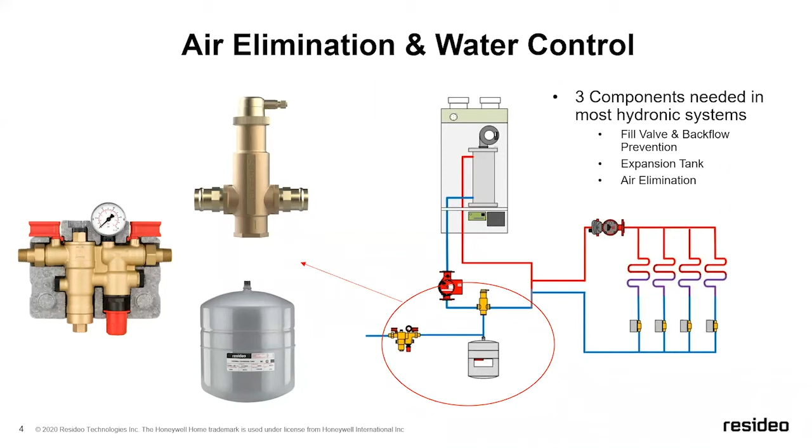Our current fill valve and backflow offering is, if you're looking at a good, better, best layout, we offer the better and the best, so kind of your mid-level and premium offering. We've got two different devices out there.

When you're looking at what this accomplishes, it really is just there to, one, prevent cross-contamination. So when you fill a hydronic heating system and you get it up to, let's say, 12 pounds, you start running it, you never want that water to work backwards into your city. The reason is, once this is filled, there's a good chance you're never going to have to touch that water in that system for 10, 15 years.

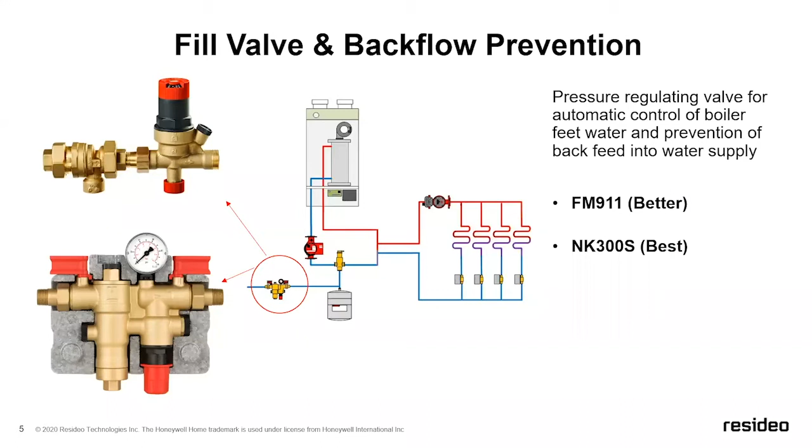So I don't know about you, but if I had a cup of water that had been sitting on a counter for 10 or 15 years, I definitely don't want to drink that. So the backflow prevention accomplishes that task. It prevents any water from working backwards. The fill valve is a glorified pressure reducing valve. So that's going to basically set your pressure, and these two different devices accomplish both tasks, and we'll get into a little bit of each one.

So the first is our FM911. We've had this out for several years. It is very similar to our plumbing D06 pressure reducing valves. But if we look at these two different devices, which are shipped in the same package, it includes two parts. First is a BP900 backflow preventer. The second is our VF06 fill valve. I've got a cross section below so you can kind of see what the guts of this look like.

So when I was talking about the backflow prevention, really all a backflow preventer is a glorified double check valve. It has two check valves for redundancy, so that if either one of those checks fails, you're going to get water bleeding through what's called the vent port. It's basically a drain. So if either one of those check valves doesn't seat properly, if the seats wear or tear, if you run into some weird pressure imbalances, it's designed to actually have water come out of the vent.

That's by design. Every now and then we'll get a call asking, well, what's going on with this? I've got water coming through. Chances are you've got something not seating right, and the most common culprit for that is going to be sediment that gets in and sticks that open. Once it goes through the backflow preventer, which is basically a big safety device, it enters our pressure reducing valve, or our fill valve, which in this example is our VF06.

So as water enters, it comes into a spring-loaded diaphragm that allows you to set the pressure at the very top of it. So we use what's called a dial set. It will show the actual pressure rating right at the top. And as you turn that red handle, either clockwise or counterclockwise, you're going to be adjusting the spring tension, which is going to adjust the pressure setting going into the system.

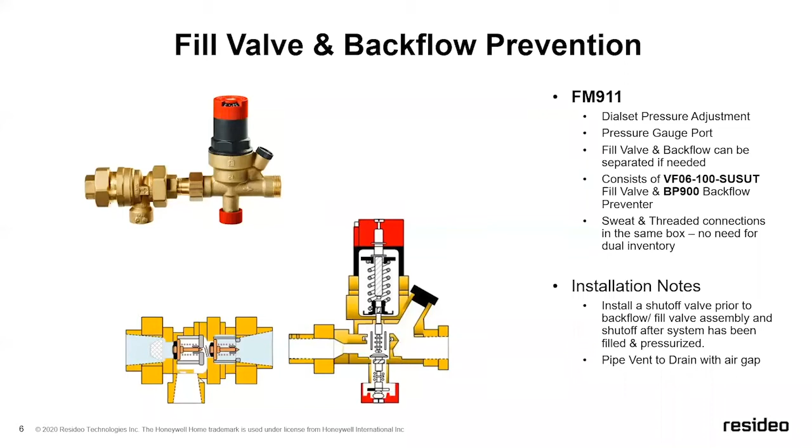When we step into our premium tier offering, we have our NK300S model. Now, this unit comes with some of the accessories that a lot of times are field installed, one of which is the pressure gauge I was just describing. This already ships in the box. We also have two isolation valves on this product. The reason we have two isolation valves is because this product is completely serviceable.

One of the big failures on our fill valves or backflow preventers, and I say ours, but really I mean everybody's, is sediment. As sediment comes through, it sticks in the diaphragm, sticks in the check valve assemblies, and that's really what causes the failure. That's what will allow pressure beyond your setting to enter the system, and that's really kind of the culprit of most of the problems that we see with those devices.

So by isolating those check valves, you can take every single part out of there. And I've got an image down here in the bottom right. I'm going to try bringing my mouse over to see if you can see it. But every single piece of this can be taken apart. So in figure 9.2.2, I'm showing the first check assembly, as well as a large, that number 6 is actually a large stainless steel screen. Every part of this can be taken out, cleaned, and put back together.

Because of the isolation valves, it gives you the ability to shut it down without having to drain down any of the system. So it makes it really easy to kind of get in, clean it if you need to, and put it back together. We also have 3 plugs that are on here. So I'll kind of point to those. We have 1, 2, and 3. And up here in the top section, you can actually hook a magnehelic to measure the pressure differential.

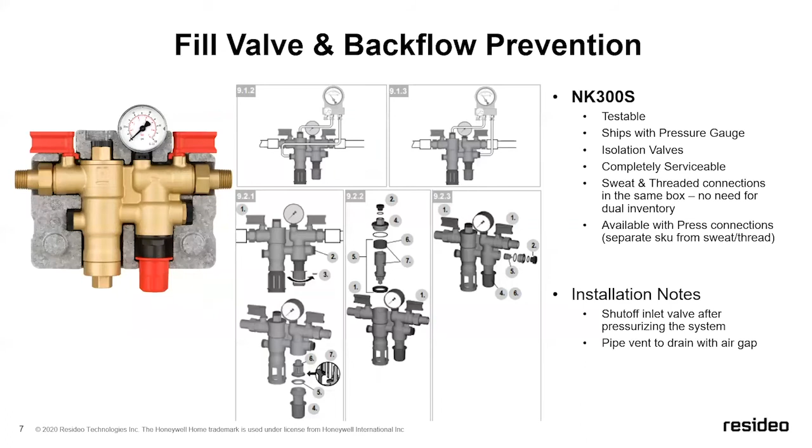I want to touch on pressure settings. So both of the fill valves I just showed you have pressure ranges from, they vary a little bit, but roughly 8 PSI to 50 PSI. If you look at any of the old boiler manuals, you'll see just about everything is set up with 12 pounds. That's just kind of the number that's been used for years and years. It works in most applications, but I want to point to what happens when you change your static pressure, what you change the fill pressure to.

When we use 12 PSI, there's a formula here that I want to identify because this is the formula you're going to use quite a bit. And that's 1 PSI is equal to 2.31 feet of head. These 2 numbers are used in hydronic heating systems in varying components. So pumps a lot of times will reference feet of head. Static pressure, your fill, will reference PSI, and sometimes we go back and forth.

So in this example, I want to show you 12 PSI, and I'm using an example where the boiler is down in the basement, which is predominantly most of the hydronic systems that get installed. If the boiler is down in the basement, if you set that to 12 PSI at the lowest point, that's going to allow you to have pressure up to 27 feet. When you get beyond 27 feet, you essentially run out of pressure. And the problem with that is now if you have any automatic air vents, it will actually start sucking air back into the system. So you want to make sure that you maintain positive pressure throughout the hydronic system.

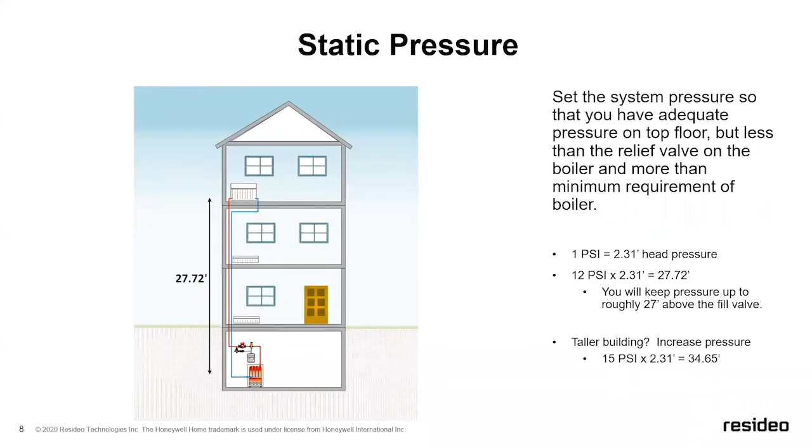When we look at filling, the initial purge is one of the most important parts of the hydronic system. Obviously, you want to make sure there's no leaks and you want to make sure your layout is done correctly. But if you speed up your initial purge process, you're going to end up with air collecting in pockets, which will act like basically blockages. My recommendation when you start filling a hydronic system is to go not only zone by zone, as I'm showing in this image where you're just purging through one specific zone, but also go loop by loop.

So let's say hypothetically that one zone valve fed a remote manifold with 4 loops. My suggestion would be while you're draining through here, through the fill valve, go up to the manifold and go every single loop one at a time. And the reasoning is water takes the path of least resistance. So if you weren't able to lay out your tubing to where every loop is exactly, let's just say 160 feet, let's say you had 3 loops at 160 and you had one that was 220 feet. There's a good chance if you have all of the loops open at the same time, you're not going to purge properly through that longer loop.

Because again, water is going to take the path of least resistance. Those 160-foot loops don't have as much resistance through the piping. So there's a good chance you're going to be purging through those first 3 great and never get that 4th loop, that longer loop, purged properly. So my advice is to go loop by loop by loop as you purge through here.

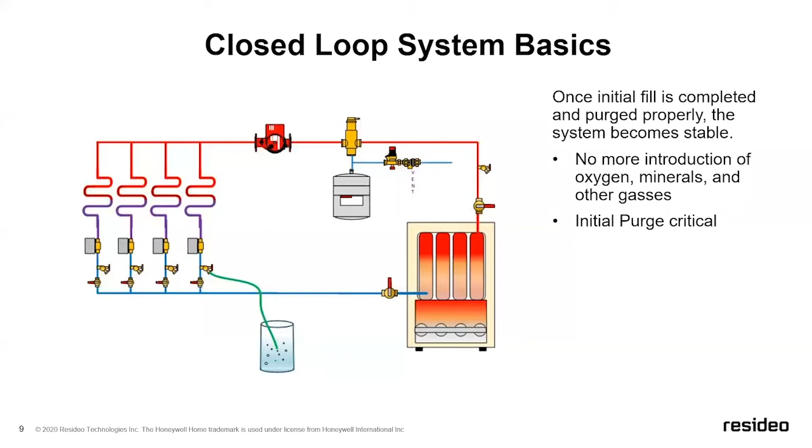As we get into another incredibly important piece of the hydronic system, and this kind of ties into all the pressure that we've been talking about, we get into our expansion tanks. An expansion tank is absolutely required on every closed loop hydronic system. Our expansion tanks have half-inch tappings because that's typically the same pipe size that you have doing the water feed. It's also coincidentally the same half-inch tapping that we have going into the bottom of our air purger or SuperVent, which is our air elimination device.

These all pretty much come pre-charged at 12 pounds from the factory. They can handle 100 PSI, which is far above and beyond anything you'll ever see on a residential system, or I should say should ever see in a residential system.

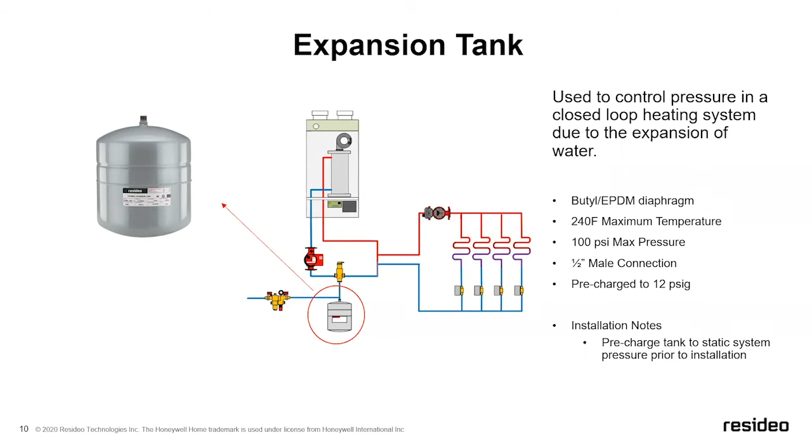And one thing I'll note: when you fill this system the first time, before you install your expansion tank, I said that they come pre-charged to 12, but if you remember back a couple minutes ago, I talked about how more and more people are starting to move into a 15 PSI static pressure. Well, if you put an expansion tank on that's charged at 12 pounds to a system that's charged at 15, you're preloading the air side of that expansion tank.

So when you install an expansion tank, before you hook it up, you want to take an air pump and pump the bottom of that expansion tank up to the pressure you're going to run your system at. So if you're going to run your system at 15 pounds, you want to pump it up to 15 pounds. That will create the same pressure on the air and the water side, which will allow full absorption into the expansion tank. The reason that's important is water expands as it gets hotter.

So if you fill a system, and let's just say it's cold when you fill it up, you're in a cold climate, it's 45 degrees. When you go to kick that boiler on, theoretically, that boiler is going to go from 45 degrees all the way to 120, 130, whatever your system design is. As it heats up, it's going to expand. You have to have somewhere for that to go. Otherwise, your pressure is just going to go up until it hits the relief valve setting on your boiler. Most residential boilers are set at 30 PSI relief, meaning if your pressure ever hits 30 pounds or close to 30 pounds, it's going to bleed out through the relief valve.

So a few things will happen if that takes place. If, let's just say hypothetically, you did take my suggestion and shut the water feed off, when the relief valve pops at, let's say 30 pounds, it's going to be under a higher temperature situation. So the relief valve is going to go off until it equalizes the system pressure at 30 PSI. Then the water is going to eventually cool down once the boiler satisfies. The problem now is, as the water cools down, you're going to lose your pressure because, again, it had nowhere to go. So as the pressure drops, now you're going to go below the minimum required pressure to fire the boiler for the second time.

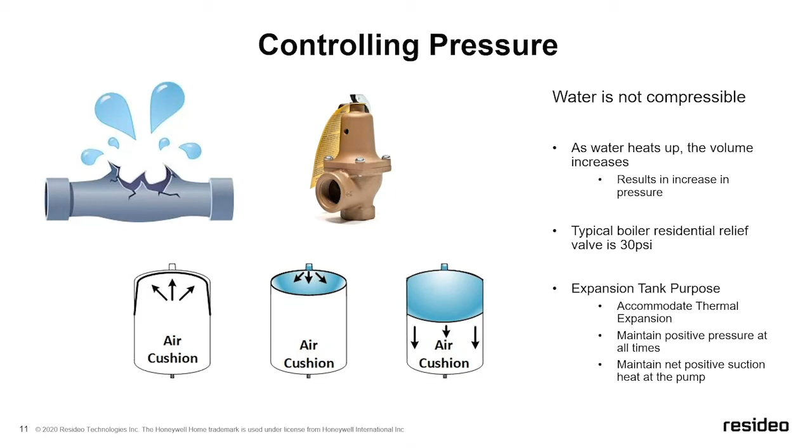The other thing I want to talk about, and this is more for the pump placement, but I wanted to reference it here since we're talking about a lot of these type of topics, is where the expansion tank goes in reference to the pump. I see this done incorrectly a lot. When you look at your expansion tank and your fill valve port, because most of these components are tied together, this is considered the point of no pressure change, point of zero pressure drop.

So if you fill this system, and I'm going to go back to our 12 PSI example, if you fill it to 12 PSI, you have 12 pounds on the expansion tank, both on the water side and the air side. When your circulator comes on, the whole point of a circulator is to create a pressure differential to drive flow. So if you pump into an expansion tank, let's just say that pump is going to create a 14 PSI differential. Little extreme for a residential system, but it helps sell the image that I'm trying to paint here.

If it's creating a 14 PSI differential and you're pumping into the expansion tank, whose purpose is to absorb any kind of pressure change, you're basically pumping against that bladder. You've now got 12 pounds coming out because the expansion tank is doing its job. Well, in order to have that 14 PSI differential, it is basically creating a negative pressure on the suction side. As I talked about earlier, if you create negative suction, any point where you can introduce oxygen, you're going to suck air back into the system. I'm going to talk about why that is, but it's not good.

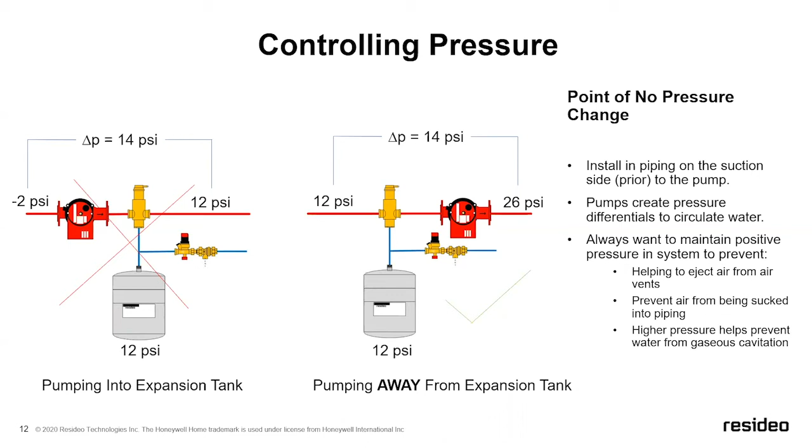When you size a hydronic system, you want to make sure you don't oversize components, because if you oversize your boiler, it'll short cycle. If you oversize your pump, it's going to work outside of its duty curve. If you oversize an expansion tank, nothing bad happens. So if you're ever on the cusp of getting an expansion tank that's a little too small or a little too big, always go bigger. It's not going to hurt anything, and the price difference from one size to the next is pretty negligible.

So when you're looking at expansion tank sizing, the best way to calculate what size expansion tank you need is to figure out how much water you have in the system. It's not that complicated. A lot of people get really nervous when they have to figure all that out, and there's not too much to it. So when you calculate the water volume in a system, look at your main components.

So I'm going to go back to an in-floor radiant system. There's a couple of things you got to add up. You got to look at your boiler, which most of the newer boilers have less than a gallon of water inside of them. You can look at your loop that you have, and I just grabbed my calculator. I'm going to go through an example real quick.

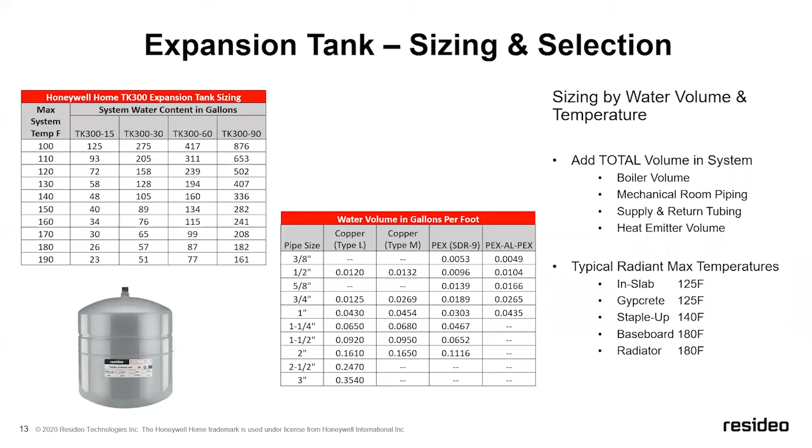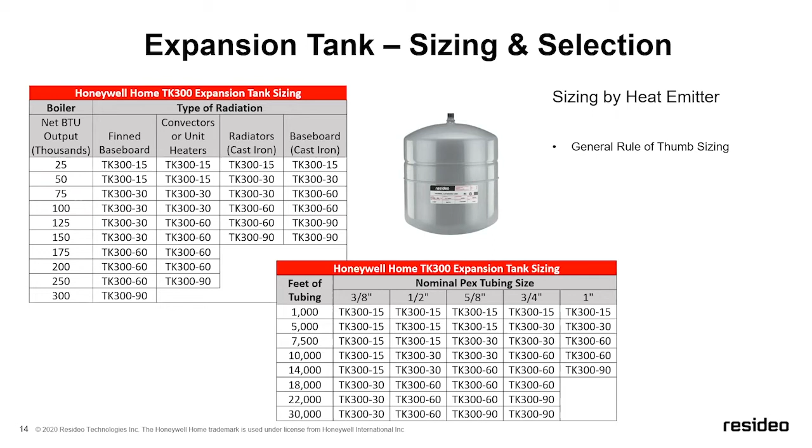We do have some general rules of thumb that exist. I'm not a huge fan of these because a lot of times this is using much older technologies that have been a little bit obsolete from the sizing standpoint. So these tables do exist. We back them, we support them, but my personal opinion is try to get an estimate on the water volume and calculate it out from there.

The next critical piece that every hydronic system needs to have is a main air elimination device. We've got a couple of different configurations for this. We have an air purger, which is sometimes referred to as an air scoop. We also have our SuperVent, which is a microbubble air eliminator.

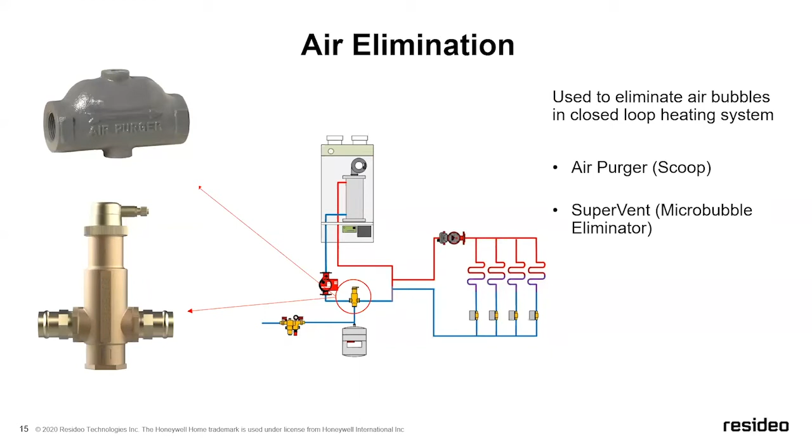Before I jump into the two devices that we sell as your master air elimination product, I want to talk about really where air comes from and what happens if you don't get it all out. So I talked initially about taking your time when you're doing the initial purge. When you're doing the initial purge and really filling the system, you're basically displacing the open piping with water. The problem is when you fill from the city main, you're going to get a water and air mixture.

If you go to your faucet and open it up, the reason it doesn't come out perfectly clear is because you're getting an air and water mixture coming out of there. It's the same thing when you fill and purge. If you purge every single line and then you turn the system off, you've got all those little microbubbles which are eventually going to collect together and create one giant bubble. So that's one of the biggest culprits for where air comes from: when you initially fill it up, it's entrained with air just from the properties of filling.

Next, I'm going to talk about PEX, and I hate to pick on manufacturers. I'm not even picking on them, but I wanted to bring this up because Wirsbo, or Uponor, has a real big presence. They make two different lines of PEX, right? They have AquaPEX and hePEX. You need to make sure that you use hePEX because it has an oxygen barrier.

If you use the AquaPEX, it is significantly less expensive, but the problem is you're actually going to get oxygen molecules traveling through there. They call it oxygen permeation, which is just constantly going to be infiltrating your system. There's no remedy for that. And typically once your PEX is installed, it's installed. If you don't take care and get rid of all the oxygen, you're going to have oxidation on parts, pieces, etc.

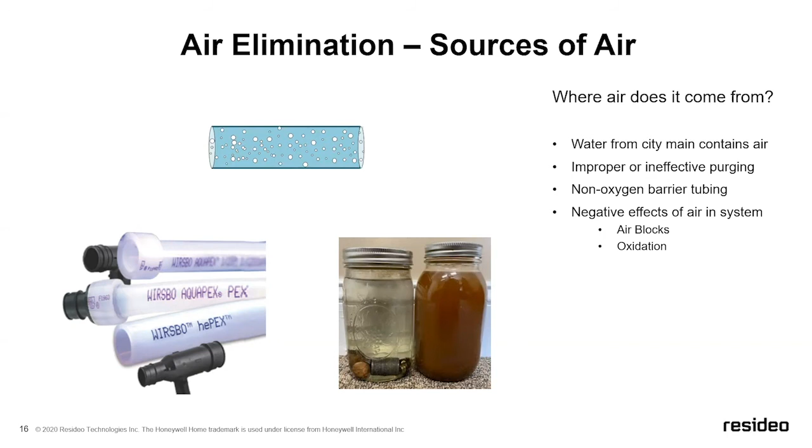Our air scoops, our air purgers, we've had for a very long time. They're made from cast iron. They're big honking pieces of metal, basically. Very inexpensive. We offer them in our product portfolio from 1 inch to 1.5 inches. And what you do is you install an automatic air vent at the top of them. We have a 1/2 inch connection at the bottom because that's typically where the makeup water is fed in. There's a few things that you need to pay attention to with this.

The way that this operates is you have to have probably at least 18 inches of straight pipe before it, because you need the air bubbles to float up to the top of the piping so that when it enters this device, it's going to basically get scooped up through those vanes and driven up into the automatic air vent. In order to do that, your velocity has to be relatively low, so ensure that you don't have any more than 4 feet per second.

And you also need to make sure that you've got enough straight pipe before, because if you 90 right into this, you're going to get a lot of turbulence, which is going to prevent that air from rising up to the top. The thing is, this type of design works fine for baseboard that's done with copper tube or copper fin or cast iron boilers, because there's a real large water passageway, a lot of volume there.

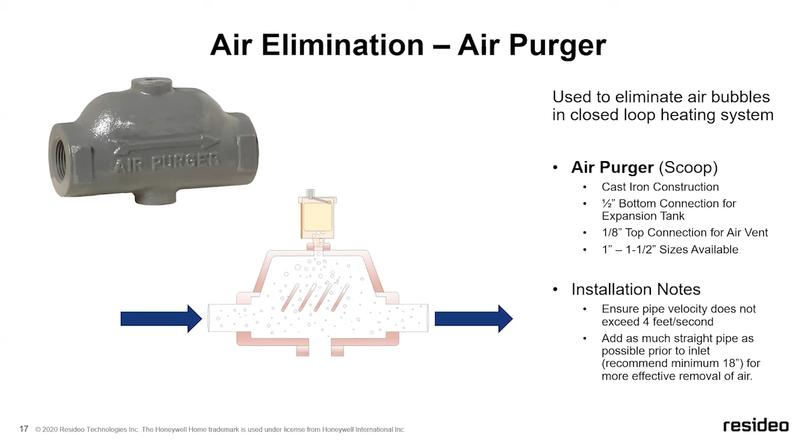But as we've moved into high efficiency boilers taking over a big portion of the market, with PEX and small diameter tubing being utilized, all the little micro bubbles that you see coming through the end create noise issues. They also create a lot of problems for the boiler itself. So we have seen a massive transformation away from the air scoops that I just showed and into the SuperVents.

The way these work is, instead of relying on air floating up to the top, we use what looks like a stainless steel brush. So as the air bubbles come in, they kind of get caught on those bristles. As enough of them collect together, they float up to the top. When you get enough of them floating up to the top of the SuperVent, it's going to push that float assembly down, which is going to pull the shutoff mechanism back and allow the air to automatically purge off. This is the way most of the air vents work.

And one thing I do want to stop here and talk about, because this is a great illustration: I mentioned very early in the presentation that not every system has a fill valve on it. The reasoning is, let's say you've got a snow melt or an ice melt system, or you've got some tubing that's running outside, you have to run antifreeze in it. I'm personally not a big fan of antifreeze in anything unless it's outside. The reasoning is glycol antifreeze has to be maintained. It breaks down over time. The other reason is it will gum up your air vents like none other.

So anybody that's ever done a glycol system and spilled it on your hands knows what I'm talking about here. It becomes sticky, becomes really tacky. And the problem is that float assembly has to be able to slide up and down, and it becomes tacky when it is introduced to oxygen. So where's one of the few points in the hydronic system where it's constantly going to be around oxygen? It's up at the floats on all your air elimination devices. So in glycol systems, you'll see some of these floats start to stick.

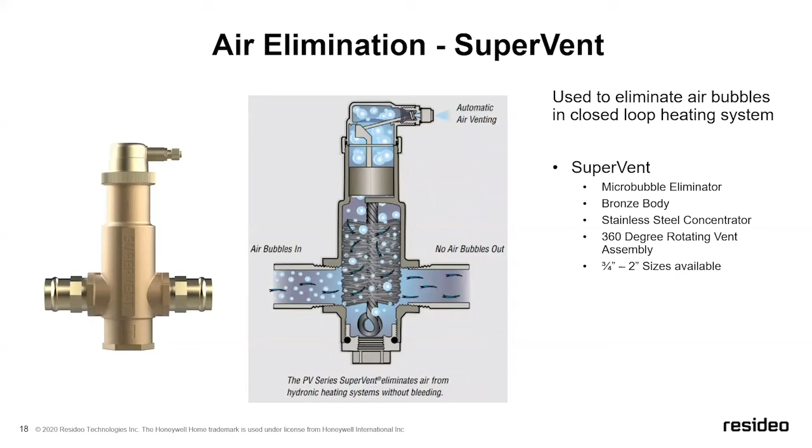And the circulators that we use, especially residentially, don't create a big enough pressure differential to push those air pockets out of there. They basically just become like blocks in the piping. The only way to get those back out is to go back through the fill valve and drive high pressure to push those out again.

So air vents, jumping back to where we were, these go at the high point. We've got a few different configurations, and I wanted to touch on some of these because I really like a few of our air vents. The first is our SuperVent top. If you'll notice, it's got that 90-degree exit. These are great for high capacity areas, spots where they're going to be running a bunch, because it's basically a high capacity air elimination device.

The EA series are my favorites. If you have glycol systems and you have air vents, I strongly recommend using the EA series. And the reason is it's got a built-in shutoff valve. If you twist the top part 90 degrees, it's almost like having a ball valve that's going to shut off

and give you the ability to unscrew the top, access the float, either clean it off, typically just with water and soap, put it back in, or I have a lot of people that just replace the whole guts. So they'll just walk in with a new valve, unscrew it, and plop a whole new float assembly in. You twist it 90 degrees back, you haven't had to drain down any of the system, you've cleaned your vent, you've fixed it, you're back in operation.

They are a little bit more expensive than our standard gold top. Our gold top, we offer in 1/8 inch through 3/4 inch. That's just your basic air eliminator, basic auto air vent. They work fine, but again, there's no way to service them. So if they start leaking, typically it's that float assembly that'll get stuck in there. There's nothing you can do other than remove it and replace it.

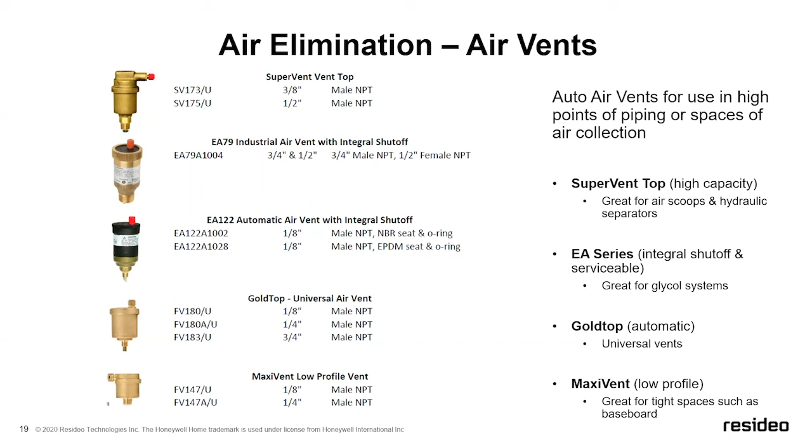So we've covered so far air elimination, fill valve, backflow, and expansion tank. Well, as I had mentioned, those 3 parts are needed for every single boiler. We have gone and prepackaged this for you. So if you grab a boiler, you can grab one of our boiler trim kits. It's got our expansion tank, our fill valve and backflow, our air separator, and we also include an expansion tank check.

So what that is is a little device, kind of like a preloaded check valve that you can screw on the expansion tank. So if you do have to service your expansion tank, as you unscrew it, it's going to put that little check in place, which will prevent water from coming out of the system, allowing you to grab another expansion tank and screw it right back in without having to isolate or drain anything down.

We've got these in 1 inch and 1.25 inch sizes, which is built around the SuperVent, or we do make these in an air purger as well. And then we have sweat or threaded configurations. And coming soon, we will have a press configuration as well.

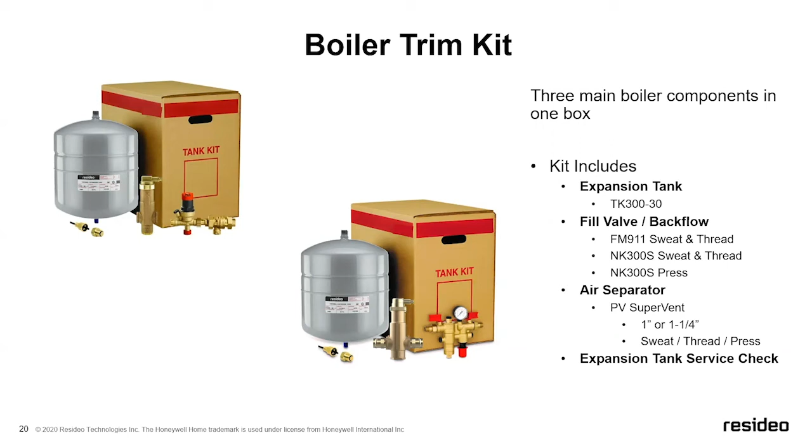I'm giving everybody on this call a little peek behind the curtain right now. These are coming very, very soon. We will have more detailed information on these, but I want to give a little bit of a teaser.

Most of the newer boilers, modulating and condensing boilers, request that you pipe them in a primary and secondary configuration, meaning you want to separate the boiler flow from the system flow. This is done inexpensively through what's called closely spaced tees, and it allows you to run variable flows out here, fixed flows around the boilers, or vice versa.

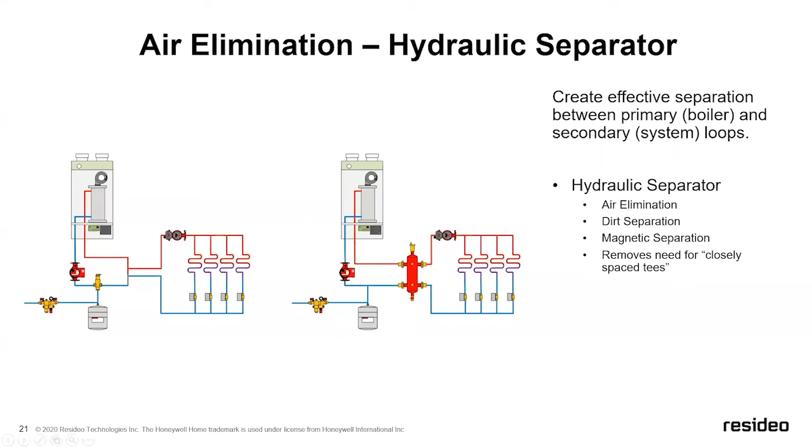Lots of different dynamics and situations that can come up. But when we look at this, one of the biggest problems I have seen just from going out and helping people in the field myself is that when you pipe it with closely spaced tees, well, the whole purpose is to create a hydraulic separation, but it is very particular on the install. And when we say closely spaced tees, my perception of close and your perception of close could be dramatically different.

And same thing with the other side. If these 2 tees are together, when that pump creates its pressure differential, there's no reason to drive any flow out here because it's going to be harder than just driving it right back through. I'm actually showing it backwards. Oh, let me go back a slide. Sorry about that. So it's a necessity for these tees to be very close together.

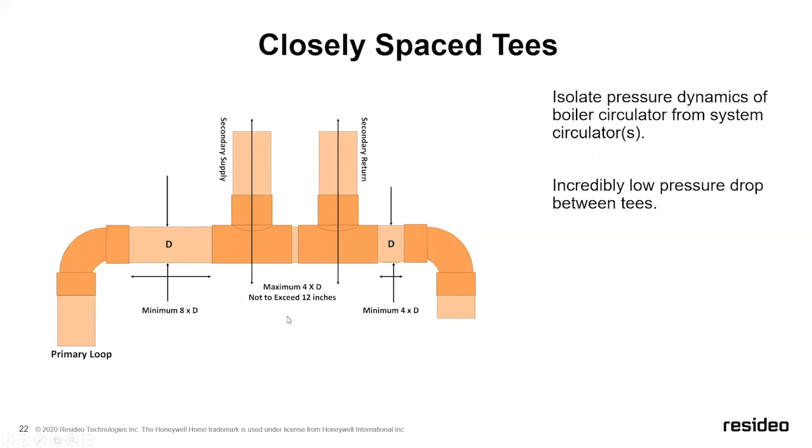I have been out to jobs with closely spaced tees where the middle of here and here is closer to 2 feet. Well, that doesn't work right. And what happens is now when this pump kicks on and this pump kicks on, they're actually feeding into each other, which is going to screw up the flow characteristics around both the system and the boiler. And it's also going to, over time, sacrifice the weaker of the two. One of the 2 pumps is going to get chewed up. So this can be done. It's very cost effective, but it does leave a lot open if there's any issues.

If we look at a hydraulic separator, it takes the place of the closely spaced tees, plus it combines several other functions. The first is air elimination. If you use our hydraulic separator, you do not need our SuperVent, because it will take care of the air elimination inside of it. As water enters the hydraulic separator, the velocity is going to drop dramatically, close to 10-fold. So if you're running a flow velocity of 3 feet per second and you enter this vessel, it's going to drop to roughly 0.3 feet per second.

So a few things happen when that takes place. First, because of the dramatic drop in flow velocity, air bubbles are going to float up. They kind of get caught against this baffle and float up to the auto air vent. Dirt, as it travels through the system, will fall because, again, of the flow velocity change. On top of that, our hydraulic separators include a magnet. This is a rare earth magnet, very strong. We will be talking a lot more about these in some future webinars, but it allows for separation of the magnetite.

And really, as we've moved into systems with variable speed circulators, that is becoming more and more of a problem, because of all those ferrous metals left in the system, as variable speed pumps use permanently magnetized motors. So when that pump kicks on, it's basically a giant magnet. So all of that junk, that ferrous metal, is going to basically get sucked into the pump. Well, you can imagine what happens if you've got junk in your pump. It's going to chew it up. So we use a magnet at the point of interchange between the boiler loop and the system loop. Now we're going to stick all of that junk in a point where it does not matter.

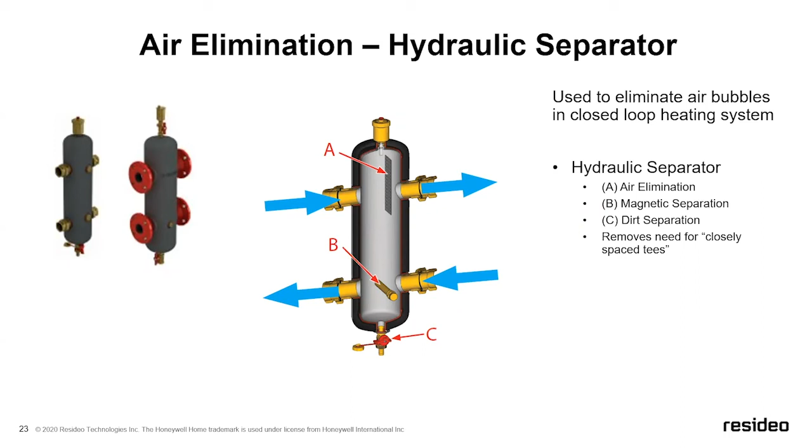This is serviceable, so as your system runs, you can isolate it. This will all be in the install manual on how to do it, but you can isolate it and actually drain all of that out of there. You pull the magnet out while there's no flow, and it's going to fall and draw right through the drain valve in the bottom. So it eliminates the need for the closely spaced T's. It takes the place of the SuperVent air eliminator. It adds magnetic and dirt separation, which is becoming more and more critical with more modern systems and system components.

Thanks so much, Chris. We appreciate you walking us through that hydronic systems overview. We're going to transition to answering some common questions about hydronic systems that you may find helpful.

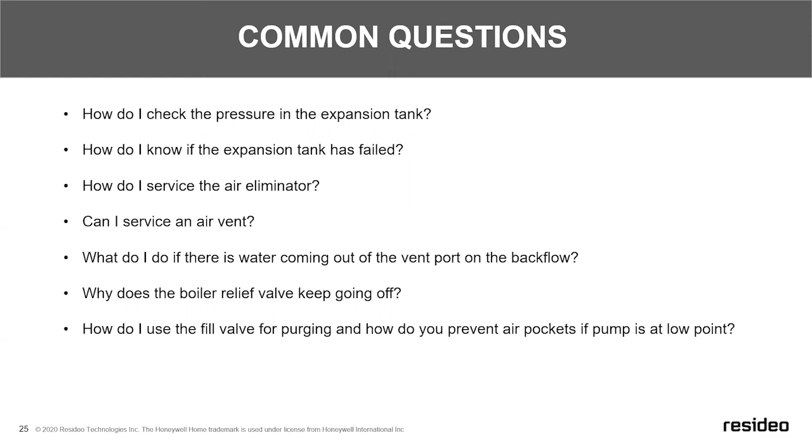And then I believe we've got some live questions as well. Yes, Mike, if you want to ask some of these. How often should the relief valve be replaced? I can take this one, Chris. Yeah, sure, absolutely.

So typically, if you're doing service on a system and you're there annually, you should be testing that relief valve. Now, if you walk into a system that has been sitting there, the manufacturers recommend that you are replacing that valve every 5 years.

Okay, the second question: is it best to have the pump on the return? Why don't you take this one, Chris? Sure. So I'm going to give kind of a cop-out answer on this. It's always best to check your boiler manufacturer install guide. But with that being said, the pump placement is incredibly more important in reference to the expansion tank.

So if you have your expansion tank on the system or the primary loop, the most important piece when it comes to pump placement is making sure that it's on the discharge of the expansion tank. You always want to pump away from the expansion tank. So as far as having it on the return of the boiler or the supply of the boiler, reference your boiler install instructions.

And then if it's on the system side, it would depend on where you put your expansion tank, but usually I see expansion tanks placed on the supply of the system. So you would put it right after that. Just make sure you're not pumping into the expansion tank. You want to get that pump as close to the discharge of the expansion tank as you can.